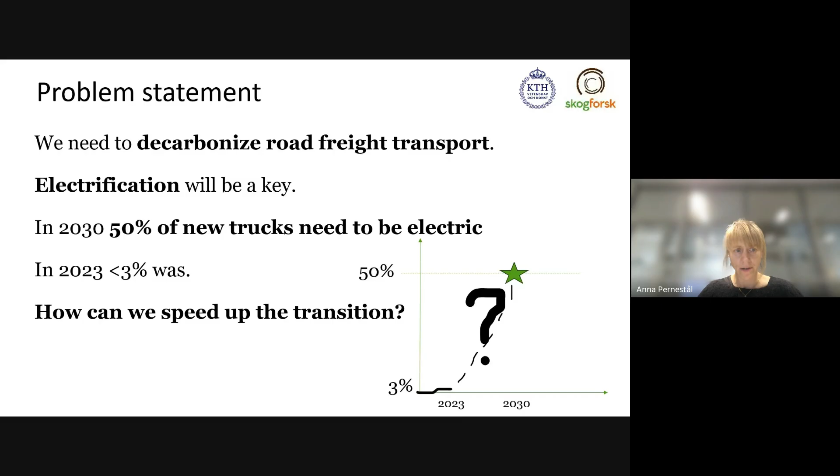We know that we need to decarbonize road freight transport to meet climate goals, and we know that electrification will be key. To reach the climate goals, we need 50% of newly sold trucks to be electric by 2030. In Sweden, it was 3% in 2023; in Europe, around 2% across the board. China is leading, but I think Europe is in second place. That means it's even lower in the rest of the world. So the question we are addressing is: how can we speed up this transition?

We know that nearly 20% of all road freight transport in Sweden is the forestry sector. We have an average transport distance of around 90 kilometers from the forest to the industries, and an average gross vehicle weight of about 70 to 74 tons. So they're relatively large vehicles driving.

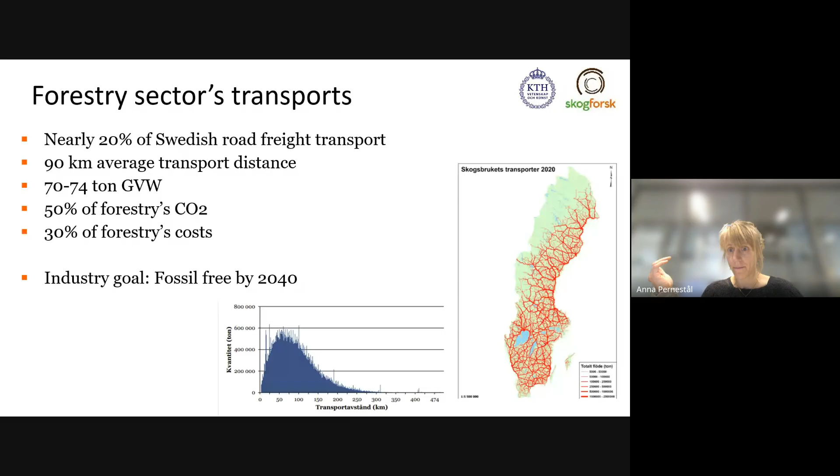The emissions from the forest transport comprise 50% of the sector's emissions. So it's a significant amount of CO2 emissions that comes from transport in Sweden in this sector, and it's 30% of the cost, so we need to do this transition also cost efficiently. The sector altogether has set up the goal to be fossil free by 2040, and they are serious with this goal - that's my impression from meeting the industry.

So the first question is: is it feasible to electrify forestry transport? These are results from a simulation study I've done together with my colleagues, where we have developed a fleet planning tool that takes a lot of inputs - the transport demand, the share of electric trucks in the fleet, vehicle specifications, charging networks, etc. - into a fleet planning tool which we call ElRutt, which is 'electric routing' in Swedish.

It basically finds, for a certain fleet with a specific share of electric trucks, the optimal routes. This simulation tool uses detailed road data and detailed energy consumption models, so it is quite realistic.

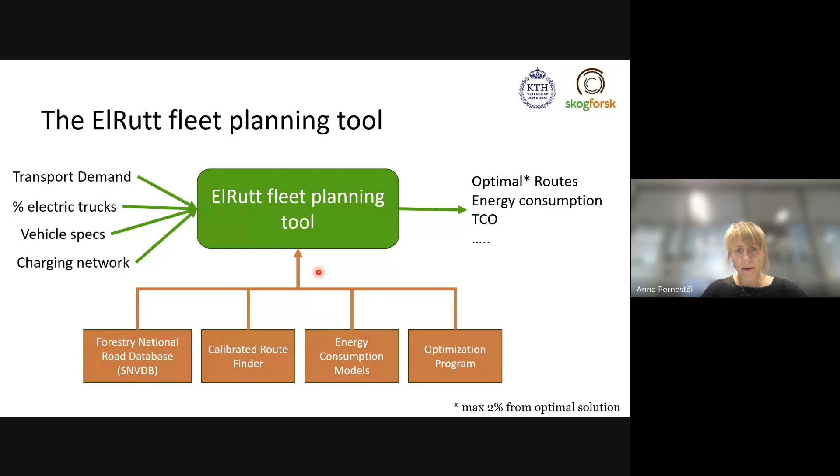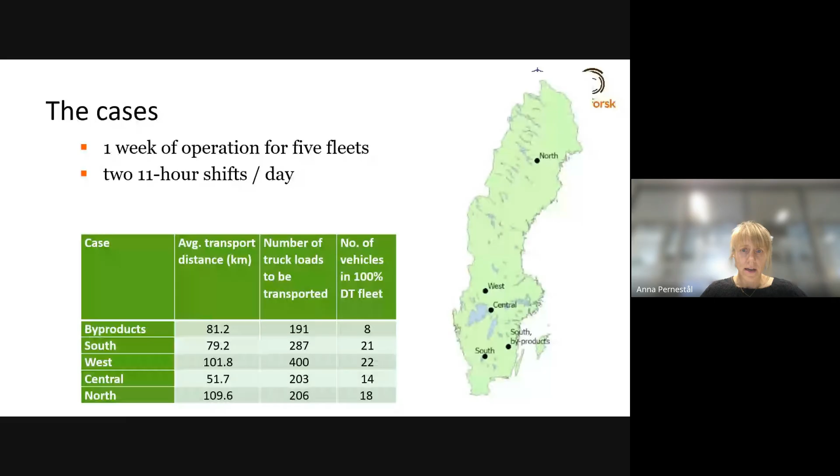When we studied the results, I just wanted to give you a few examples. We have analyzed transport data from different cases using this tool, spread out over the country - and I stress this spread over the country a lot, because the conditions are very different being in south of Sweden compared to north of Sweden, both climate, but also transport distances, and actually the business context differs between different parts of the country. We have used the tool to analyze data from 5 different real transport cases, and we have a preprint of a publication out there, so you can read more about the details.

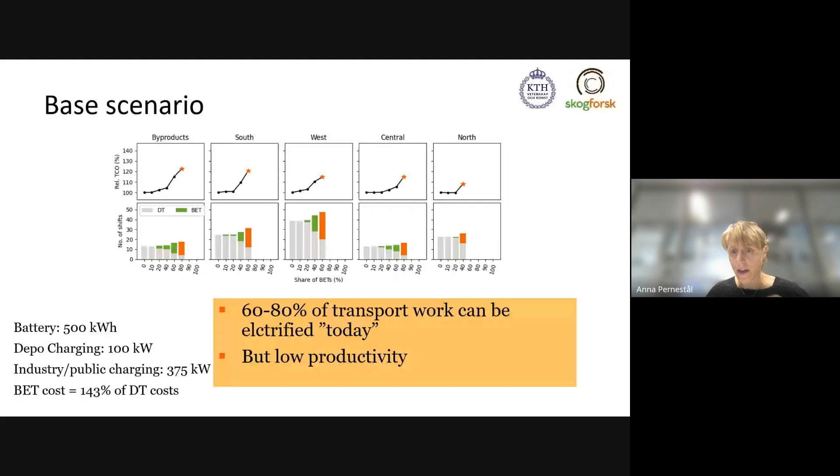Just to highlight some findings: we found that already today, around 60 to 80% of the transport work can be electrified, if we assume technology development that is the best you can buy from a truck shop today, and with about the charging network that could be present around now. So I think it's interesting to see that already today, with today's technology, we can do quite a lot.

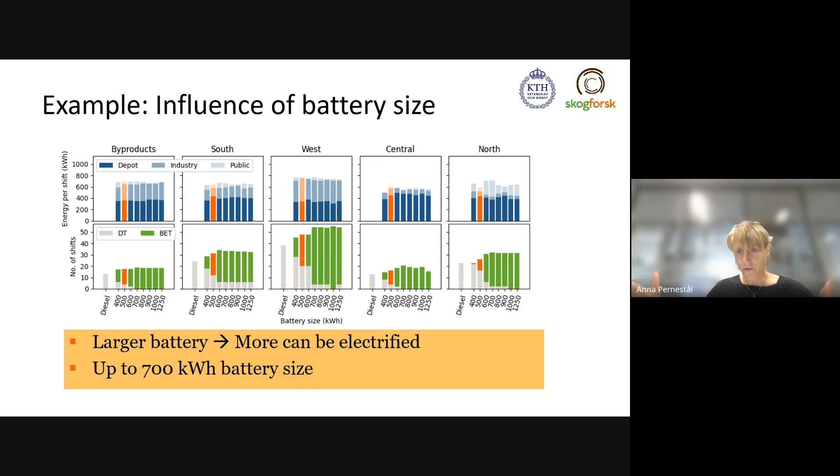We have run several different types of scenario analysis, varying different parameters. We learned that with a larger battery we can of course electrify more, but that is only valid up to a 700 kilowatt hour battery size. Going bigger for the batteries doesn't help, because we need to stop and charge anyway, due to the driving legislations we have in Europe - you're only allowed to drive for 4.5 hours, then there's a mandatory rest of 45 minutes until you can continue and drive 4.5 hours again. So oversizing is not a good idea.

There are more different simulations in the preprint of the paper, and hopefully soon also in the paper, which I'm super happy to share with you if you are interested. We have also run simulations looking at potential future scenarios, varying several parameters at the same time. When we vary the diesel price, charging network, and battery size at the same time, in a scenario that mimics what we believe would be present in 5 years from now, around 2030, the graphs tell us that we have around TCO parity between diesel and electric trucks, and that it's possible to electrify nearly all the transports.

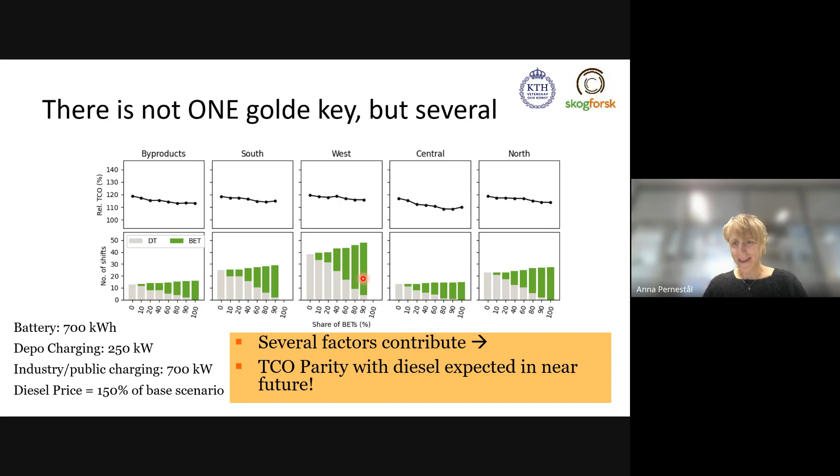The graphs tell us that with electric trucks we will need more trucks compared to diesel trucks, so the productivity of each single truck will be lower. But on the other hand, the operational costs for battery electric trucks will be lower, so we still reach cost parity. This all sounds good, we are happy and believe in this for the future.

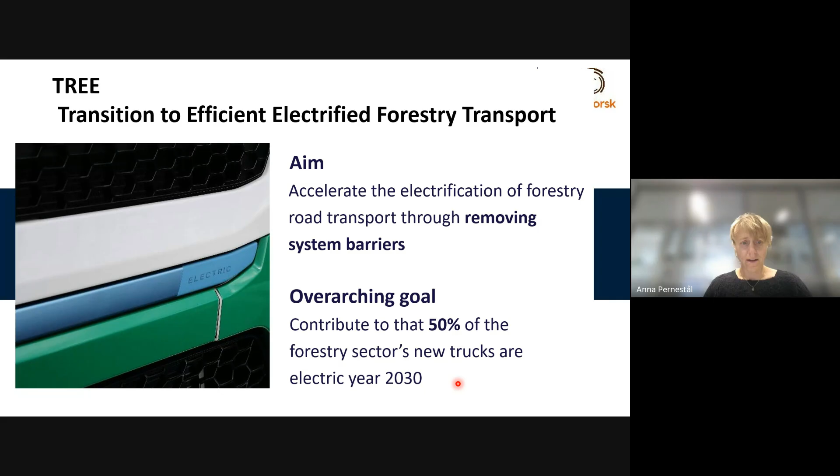In the project we will operate 12 electric trucks and one electric trailer. One of the trucks is a high-capacity transport, 94-ton gross vehicle weight, fully electric, transporting wood chips. We will also try mobile energy storage systems.

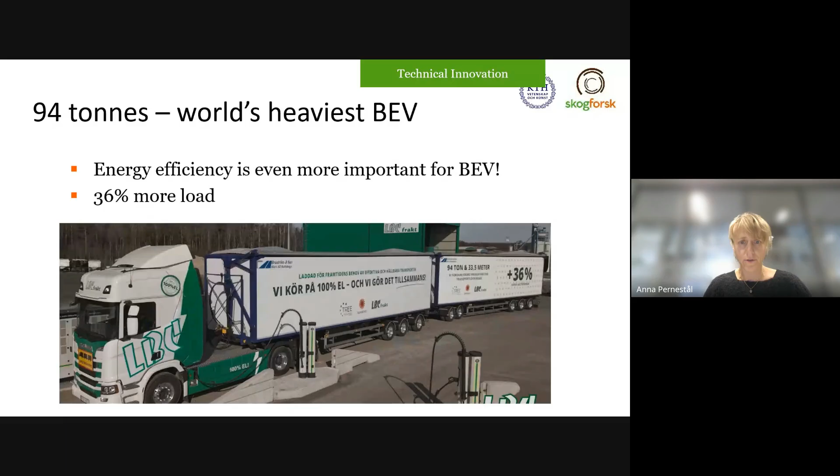We are also trying other innovations, for example an electric trailer which we are currently testing on the test track, to see how we can benefit from regeneration. The electric trailer can be used together with diesel trucks to hybridize them, but it can also be used as a range extender together with a battery electric truck.

We also have mobile energy storage systems. Sometimes a challenge in Sweden is not grid congestion, which is a problem in many other places, but especially for the forestry sector it could be grid connection at all. So we think a mobile energy storage system, basically a power bank for trucks, could be an alternative.

We are also talking about developing digital fleet planning tools. We know they are super important and critical. I don't have time now to go into the details, but we are doing that also. If you're interested in any of those parts, please feel free to contact me.

We have also done some work on what drivers think about driving the electric trucks. They typically think about charging, whether the business can be profitable, and flows and logistics. But we also know that those who have tried it don't want to stop - they love the work environment.

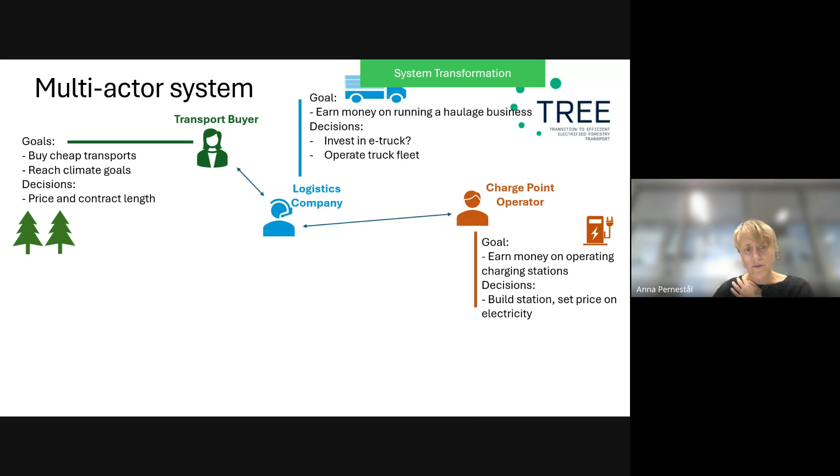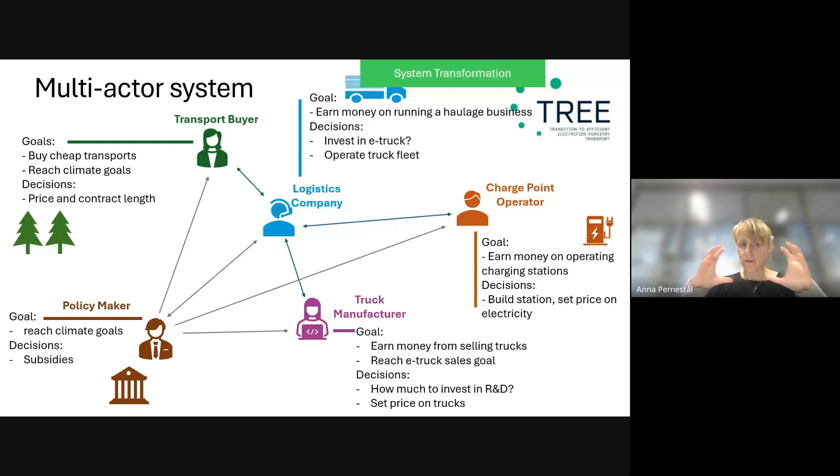And we are also testing - I think my 20 minutes are about out - but I just want to highlight that we are doing systems modeling, exploring how the different actors' goals and decisions will influence each other, and how we can understand what interventions on the whole system can speed up the transition. So with that, there's a lot to talk about here.

Just to end this presentation, the transition to electrified forestry transport is possible. We have learned that, and it is necessary. But it is indeed a complex system, so the only way to do it is to do it together.

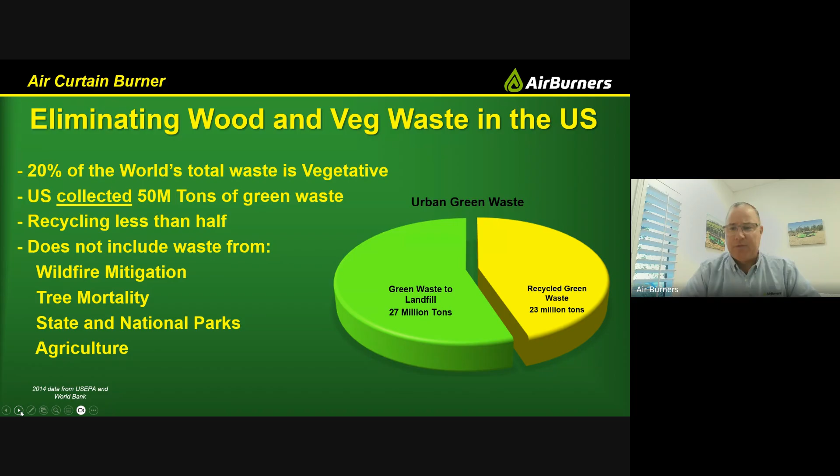The agricultural industry is really big in California, and they switched to utilizing our machines to dispose of wood waste, as we're known as the best available control technology - which simply means we're the cleanest way, environmentally. The fireboxes and air curtain burners are the cleanest way to dispose of wood waste, and also the least expensive way. So tree mortality is a major issue.

How do we eliminate our vegetation waste today? You can grind it and haul it to a landfill, or open burn it. This is a prime example of a grinder running - this was a test in Australia they wanted to do, an opacity test for our machine. This was a Peterson Pacific grinder grinding wood chips that just happened to be there the same day. Once they stopped running the grinder, you can see the air curtain burner running behind it. That's the point of our machine - you're able to dispose of wood waste, turn it into a soil amendment, but dispose of it in the cleanest way possible.

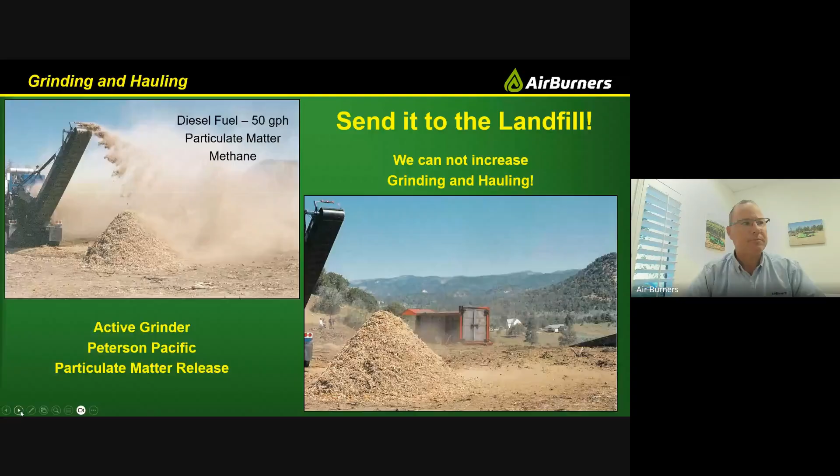Open burning is very slow. If you open burn a stump, that can take 4 days. And if you open burn, it creates a lot of particulate matter that goes up into the environment. So it's slow and smoky. This is an open burn that happened out there, an amazing amount of particulate matter. And if you don't take care of the wood waste in the forest, in areas with spontaneous combustion happening because there's too many chips sitting in one location, you're going to get this problem as well.

So too much wood waste and not disposing of it, that's what we're looking at. This is another test we did with Environment Canada on our machines. This machine is an S327, looking at it compared to open burning.

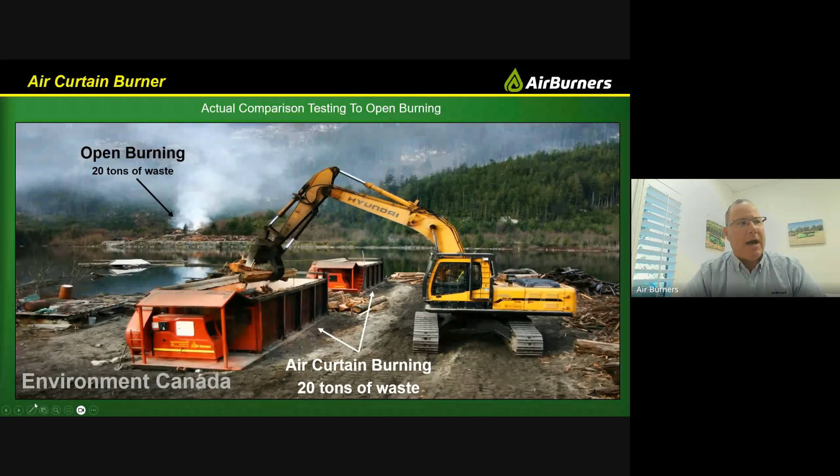This is at the BC Hydro Dam, where all of the wood waste would come up from the waterway and then clog the dam. They used to open burn this material. When they wanted to run a test with our machines, they put out 2 S327 fireboxes. Each firebox burns 10 tons an hour, so they burned 20 tons of wood waste in 1 hour with our machine, and they burned 20 tons of wood waste over on the opposite side with open burning.

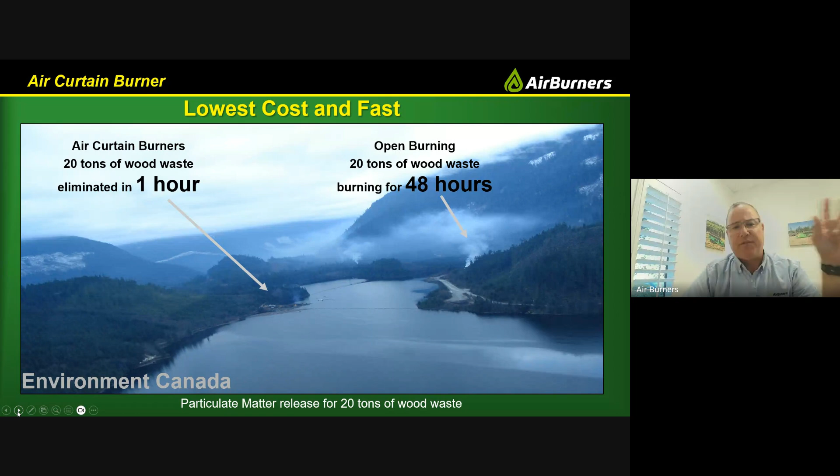This is that same picture, a helicopter view that they took. You can see in 1 hour there was little to no smoke with our machines, and in 48 hours there was continuous particulate matter going into the valley and the mountains from open burning. The fires from British Columbia are very far away in Canada from where we are in Florida, and we were still affected by the smoke here in Florida from the fires in British Columbia. So this smoke definitely does travel, but that was 48 hours of continuous smoke.

So our machines eliminate the wood waste, we turn it into a soil amendment, biochar and ash. And then we also create electricity, which I think is the biggest point of why we're here today. But I think you have to understand the firebox, because this is what we sell mostly of right now, this is what keeps us in business. This is what allows us to grow every year, because so many people need to dispose of wood waste in the least expensive way possible.

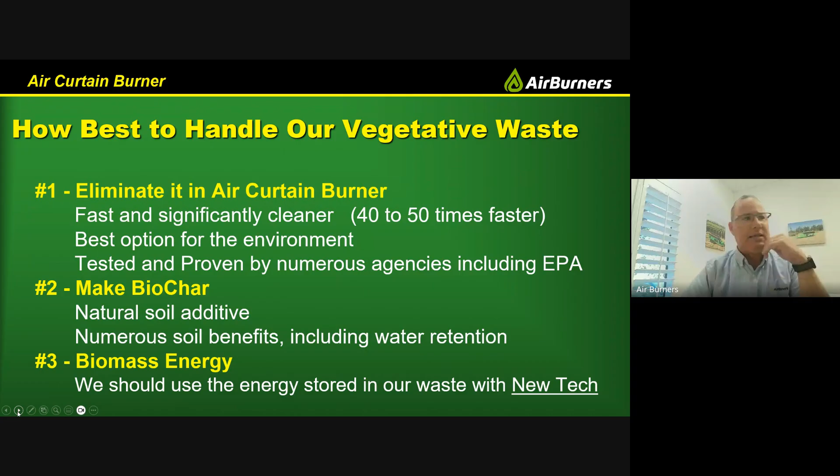And the firebox, 10 plus years. This machine, you can run it 10 plus years with minimum maintenance. Really the only maintenance is the diesel engine or electric motor. In this box that you see to the right, you have a diesel engine or electric motor. It powers a fan, and the fan blows air through the manifold over top of the firebox.

This air curtain, once you start the fire up in the firebox, you turn on the air curtain. What this does is, when the machine's fully up to speed and running and the air is coming out of the manifold, it creates an air lid over top of the firebox. This lid traps the particles of smoke under the air curtain for fractions of a second, causing them to reburn. The secondary burn reduces the smoke particle size so small it generally looks like heat waves coming out of the firebox. The whole purpose of the air curtain is to create this secondary burn.

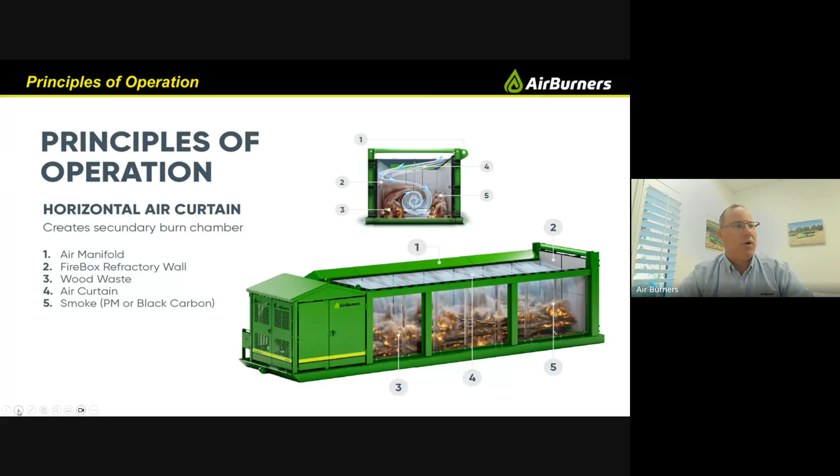The extra air also helps oxygenate the fire to burn as fast as possible. So as I mentioned before, if you were to open burn a stump that can take a few days, inside of the firebox it'll burn up in just a few hours.

Here in the United States, we're one of only 40 companies tested by EPA. EPA tested our machines here in the United States, and EPA in Australia has also tested our machines, but we are a CRADA partner with EPA here in the United States. We are a current CRADA partner with the U.S. Forest Service, and the CRADA agreement with the U.S. Forest Service, they came to us and said we want a machine that automatically produces biochar. We'll talk about that in just another moment. But the Department of Defense, just about every military base across the world has one of our machines, Department of Energy, and then of course USDA, they own our machines and promote our machines here in the United States about creating the ash and biochar.

The different sizes of the fireboxes, and just to preface this, the fireboxes are going to be part of the biocharger we're going to talk about in a moment. So I want you to take an idea of the sizes. You have a 300 series size, a 200 series size, and a 100 series size.

The biocharger is set up for the 200 series size. Once you go to a 300 series size, the firebox gets a foot taller and a foot wider. When you go down to a 100 series size, it's a foot shorter and a foot less wide than a 200 series firebox.

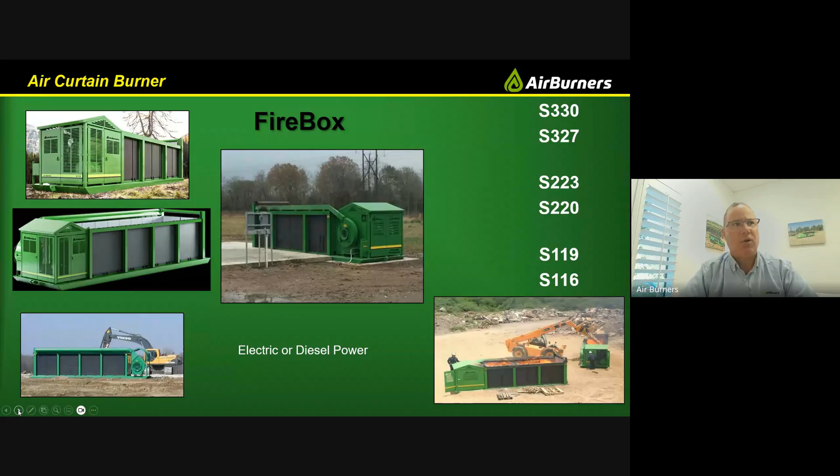The last two digits give you the interior size of the firebox you're burning in. The 100 series size fits in a Connex container, and we ship a lot of 100 series all over the nation because it's very inexpensive to ship.

The Boss series is our burn boss. This was designed for the U.S. Forest Service to burn and take care of disposal and do wildfire mitigation out in the forest, and also in the ag industry. This is utilized with farmers who want to make biochar.

We have a track boss, which is like our standard burn boss. Our standard fireboxes have an open floor, so you burn right on the dirt, right on the ground. The track boss has an open floor too, and it has a remote control so you can move it around in the woods. One customer with 3 burn bosses wanted one track boss.

The char boss, on the bottom, is the one the U.S. Forest Service came to us and said, hey, we would like a machine that automatically produces biochar. So the burn boss morphed into the char boss. The char boss has 2 thermal ceramic panels inside the firebox that move, dropping the biochar onto a conveyor belt system. This conveyor belt takes the biochar out of the char boss and drops it into a water pan, locking it into the biochar state.

This machine can produce up to about 500 pounds of biochar per hour. Average is probably more around 350 pounds per hour, processing around 1,500 to 2,000 pounds an hour in the unit itself. You'll use about 12 gallons of water per hour running this machine, up to about a 30% biochar conversion. I have many documents and tests on this, so we can go into it in more detail in the future.

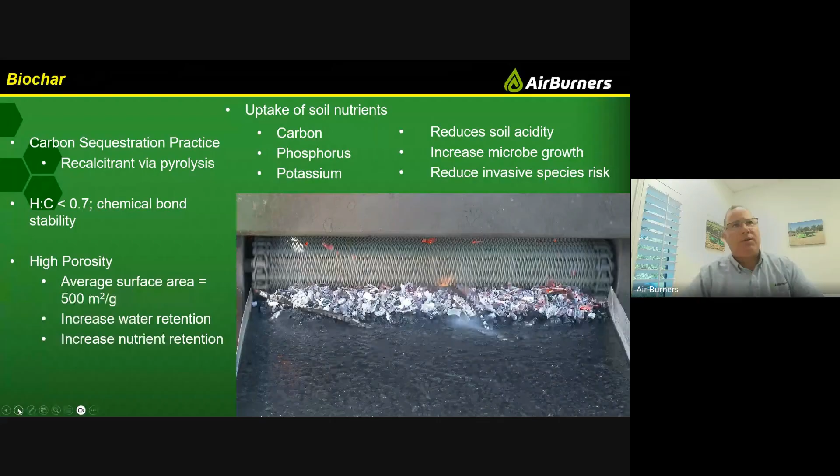The next machine I'd like to talk about is the biocharger. These machines are both newer to the market. The biocharger wasn't feasible before due to batteries being too expensive. Now, working with Rolls-Royce, we were able to purchase a battery from them, and working with Rolls-Royce and Volvo Construction, we were able to produce this machine.

This machine is an off-grid power producing machine that you can put your wood waste that's not being used, your slash, your stumps that you don't have marketable material for, into the biocharger and create electricity. So you dispose of your wood waste, create biochar, create ash, and create electricity.

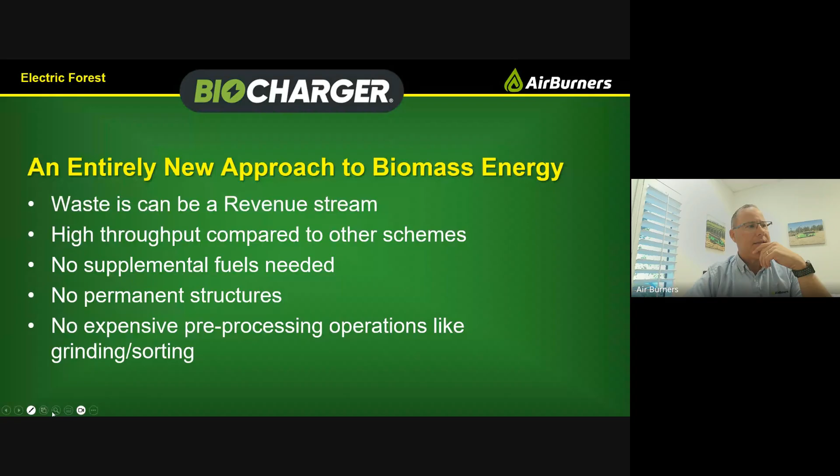This is a complete portable piece of equipment. Unlike the past structures, your typical biomass incinerator would incinerate chips to create electricity, but that was too expensive, emissions were too high, you had to transport and grind the material twice, a lot of hauling, many emissions. Once it got to the biomass facility, you took a complete burnable piece of material into one that doesn't burn, so they had to use supplemental gas or diesel fuel to burn the chips, all to create electricity.

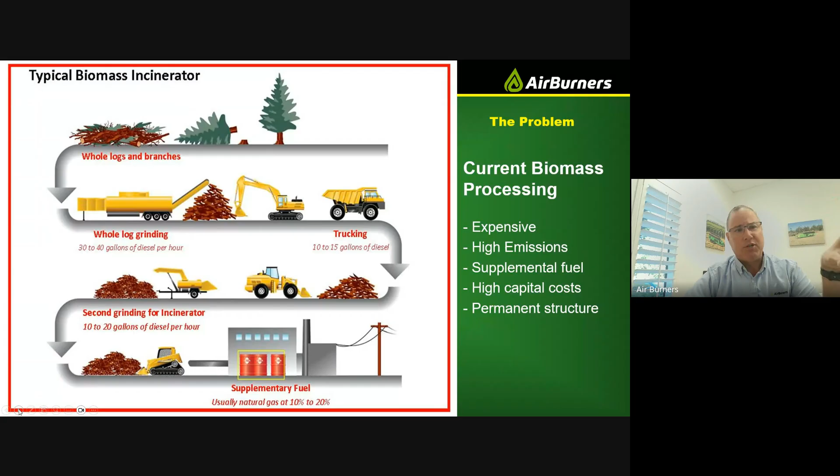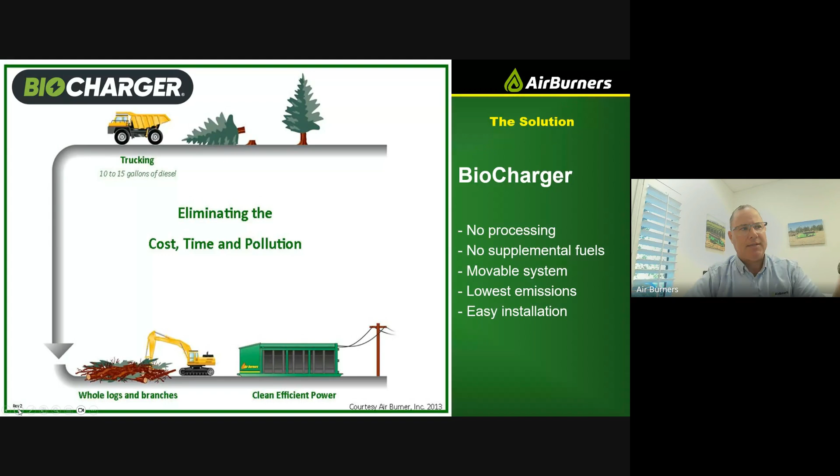Now our machine is portable, takes 6 hours to set up, 6 hours to take down. You take your stumps, logs, branches, slash, anything not marketable, burn it inside the firebox, dispose of it, make biochar, make ash, make electricity. Once you're done using it, you can move it to the next location. My recommendation is keeping it in an area for at least 6 months, give or take.

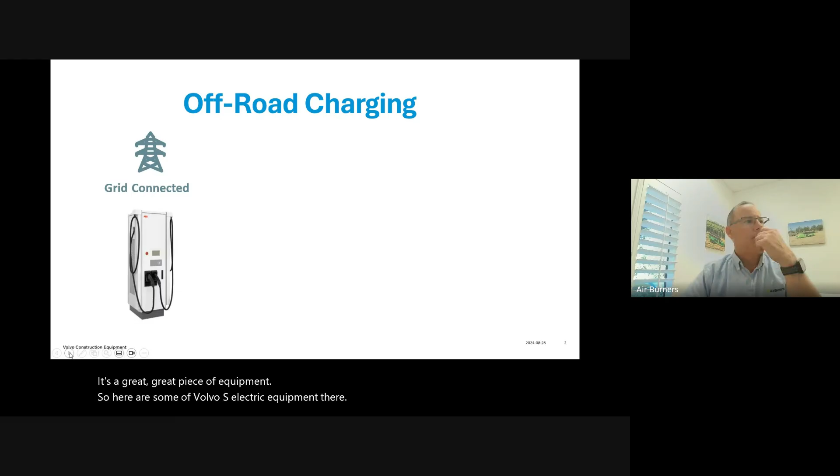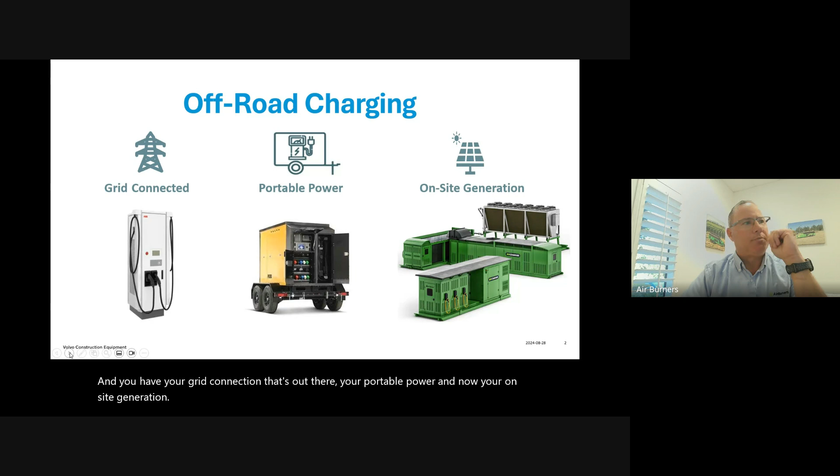And you have your grid connection that's out there, your portable power, and now your on-site generation with a biocharger. What is it and how does it work?

You have 4 pieces: a firebox module, a cooling module, a power module, and a battery storage module. This is off-grid, not connected to the grid.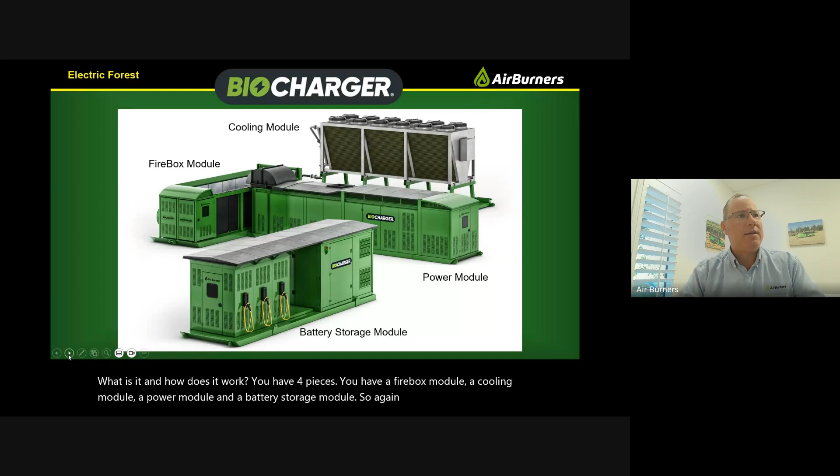With this, you're going to dispose of the wood waste inside the standard firebox, at 3 tons an hour, 5 tons an hour, 7 tons an hour, 8 tons an hour, or 10 tons an hour, depending on what size firebox you want, or how much wood waste you believe you need to dispose of.

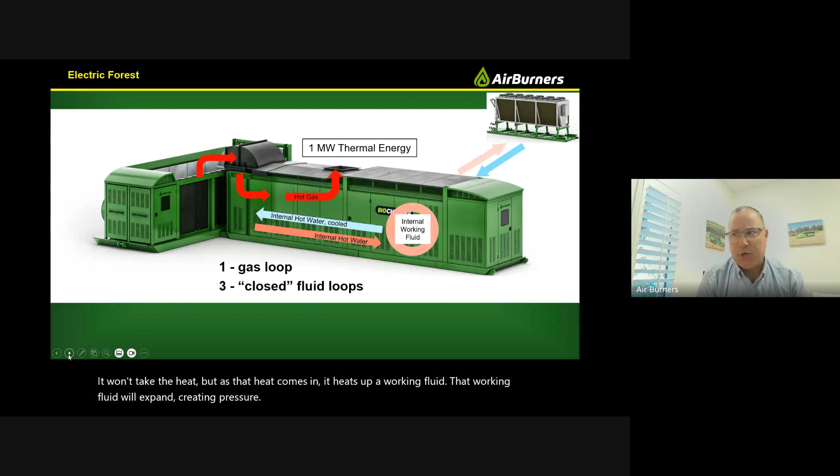As that heat comes in, it heats up a working fluid. That working fluid will expand, creating pressure. That pressure turns the screws inside of the ORC system, the organic Rankine cycle system. That's the part that makes the electricity.

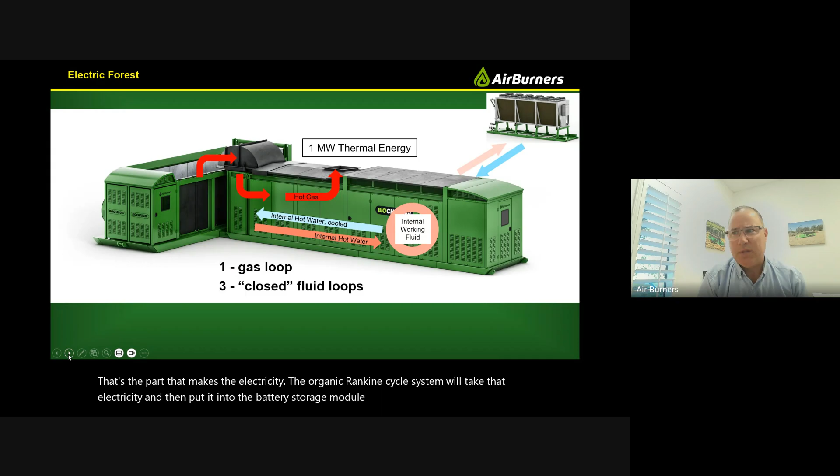The organic Rankine cycle system will take that electricity and put it into the battery storage module, built by Rolls-Royce, currently a 600 kilowatt hour battery storage module. This module will hold on to the electricity.

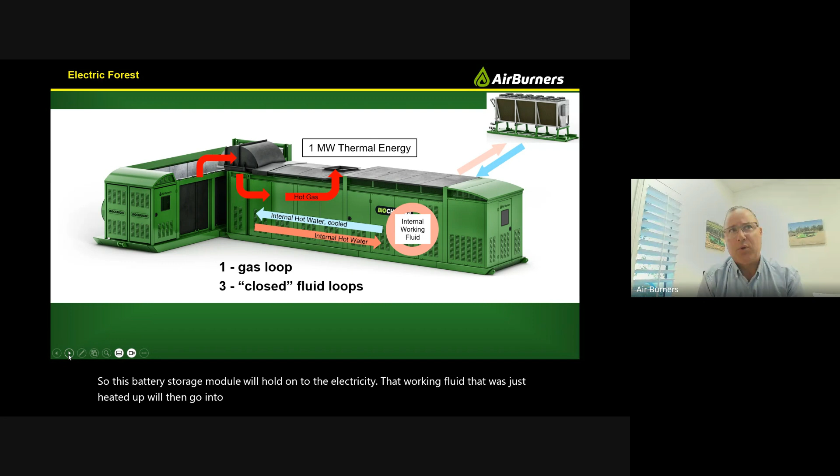That working fluid that was just heated up will then go into the cooling module. The cooling module will cool down the working fluid, and then it will be reintroduced back into the power module. This entire system works off of a red button and a green button.

So it is an automated system. The end user just needs to add wood waste into the firebox module to keep the heat going. When the power module needs heat, it'll grab the heat automatically.

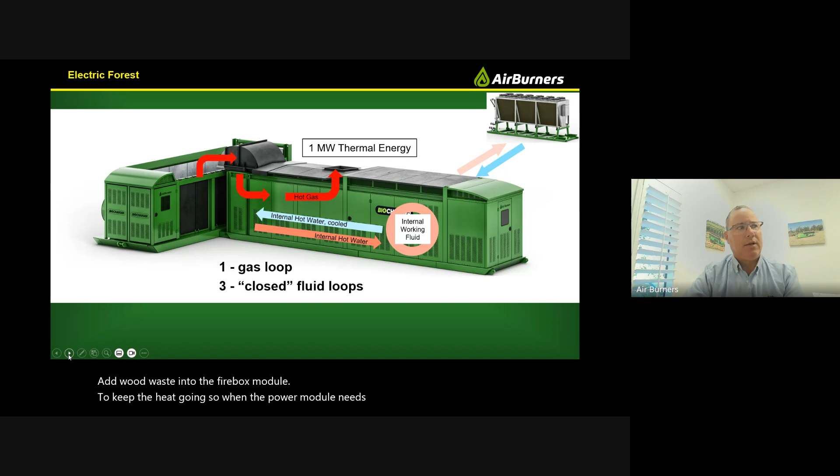This is a system being set up out in California. One county, Kern County, purchased 3 systems. They have 2 PG fireboxes and 1 biocharger. The only difference is one is on grid, the other is off grid.

The PG firebox is the one that's on grid, so it does not have a battery storage module. The PG firebox is connected to the grid.

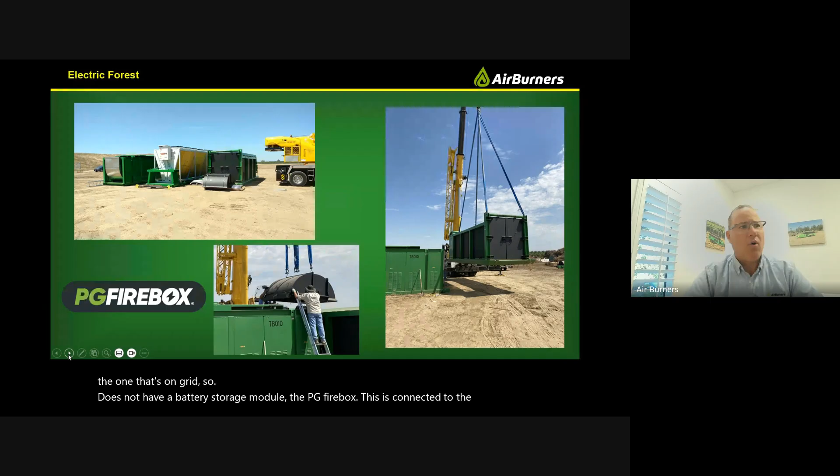The ORC system we currently have is a 100 kilowatt ORC system, but coming out in 2026, I believe, our engineers are working on a 350 kilowatt system. So this basically means a bigger battery and a bigger ORC, more electricity.

The PG firebox hit the market about 8 years ago. This was something we thought about for 25 years. The president of our company and head of engineering wanted to build this system, but it took a while to actually hit the market and become feasible.

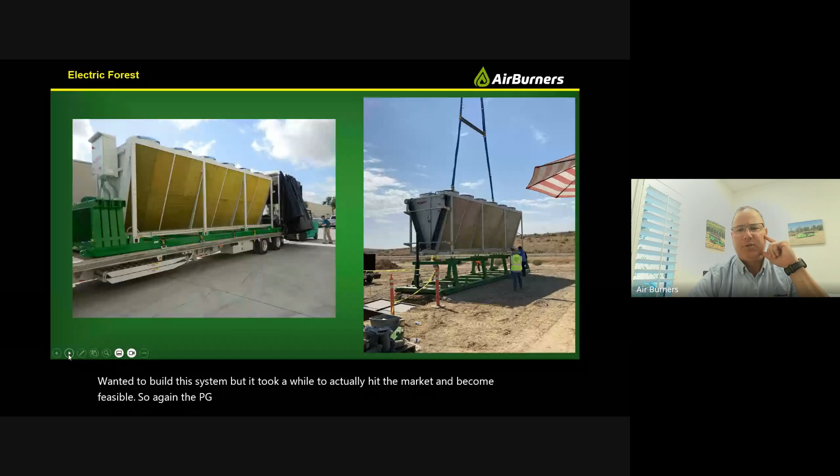So again, the PG firebox is on grid, the biocharger is off grid. This is the cooling module. All of our machines are portable, designed to be dragged around, so you can move from one location to the next.

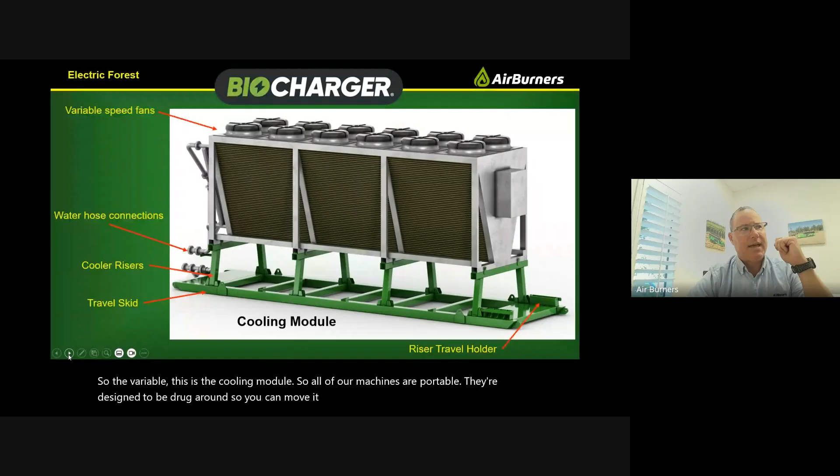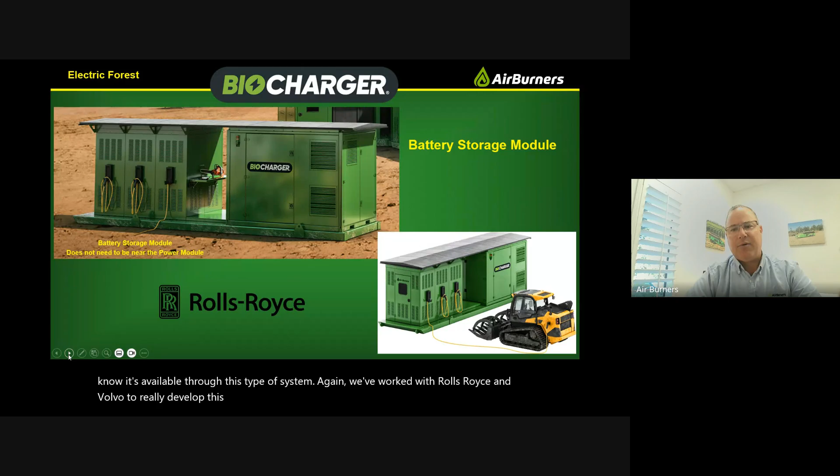So this is daytime operations. You go, you dispose your wood waste. This system also has 1 megawatt of thermal energy.

If you wanted to set up a kiln out into the forest and dry the wood waste, cut the wood waste and ship it out of the forest, you have 1 megawatt of thermal energy you can utilize from this system as well, but more importantly, charge your electric vehicles out in the field.

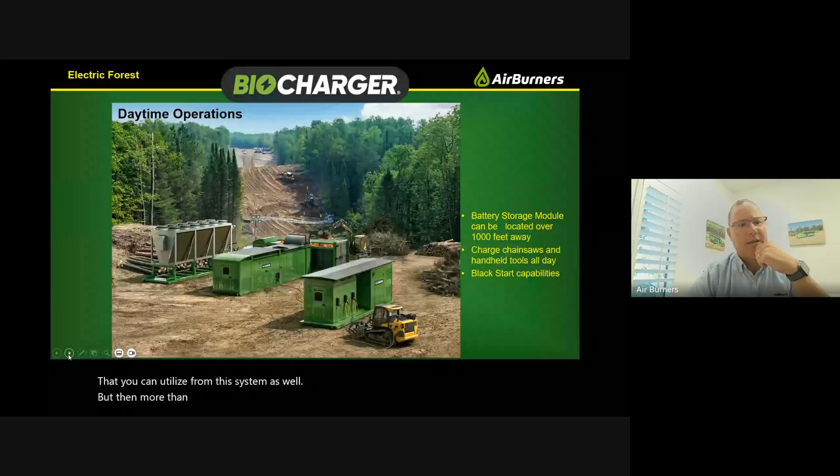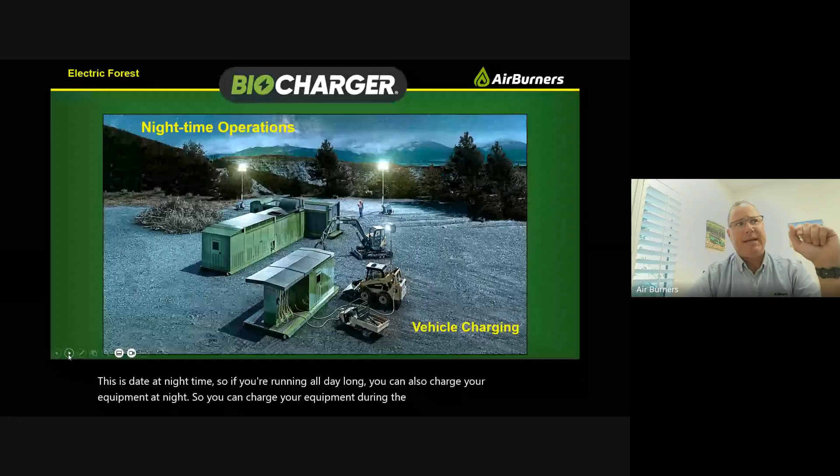This is at nighttime. If you're running all day long, you can also charge your equipment at night. So you can charge your equipment during the day and charge your equipment at night. This system will continuously just charge.

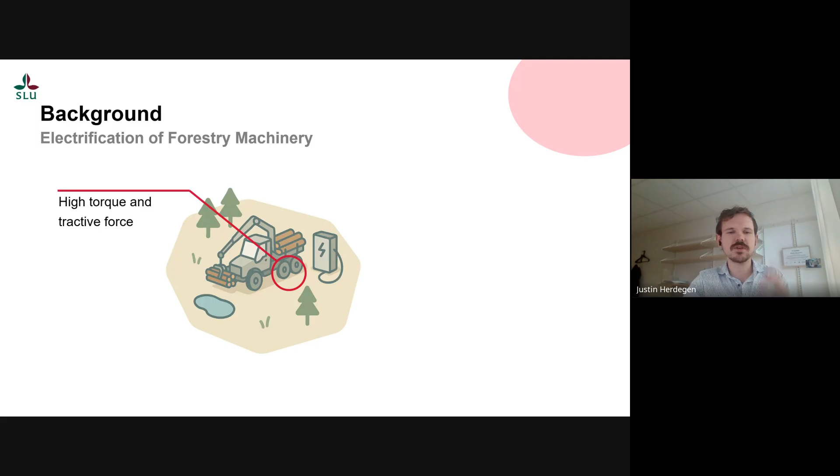So electrification of forestry machines itself is a good thing and has a lot of benefits, and is currently catching on speed, because you have things like high torque and tractive force. We have benefits such as avoiding emissions, the potential usage of renewable energy, and as well as other big advantages.

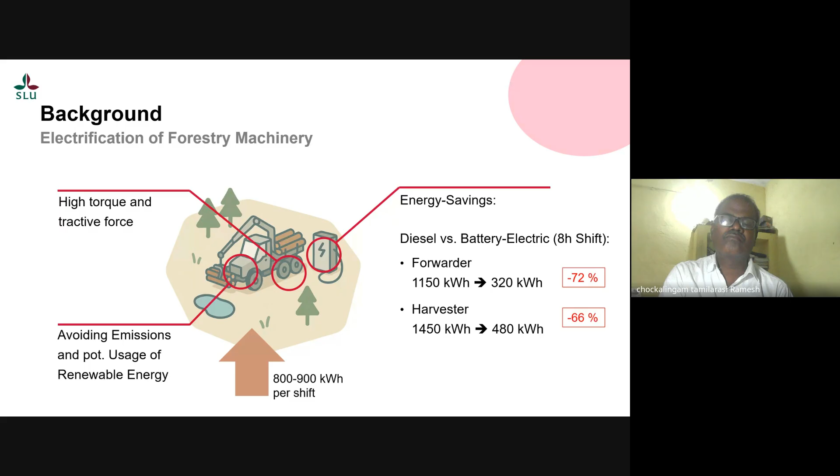Apart from avoiding emissions, the second helpful thing is that you can save a lot of energy, depending on first studies and also other sectors, it's up to 70%. But still you need to supply quite a huge amount of energy to the work site, which for a two-machine system like it's currently used mainly in Sweden, is around 800 to 900 kilowatt hours per shift.

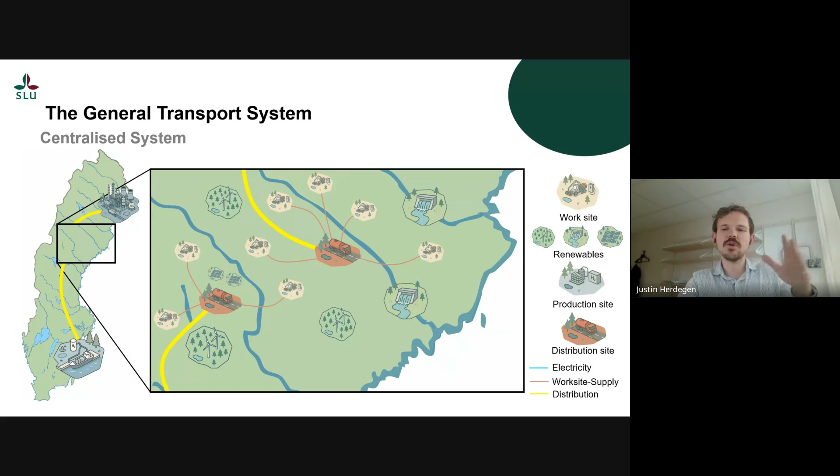But then you also have a centralized system like it's currently with diesel, where the energy carrier is produced in real big centralized locations and then only transported in the region to be distributed. We will look more or less over different energy carriers, so from the energy source, where the energy is coming from, how to produce the energy carrier, how to transport it, and also then how we can use it on site.

But first, just a quick talk about the energy sources. Renewable energies are becoming now the backbone of a future energy system, and also therefore of a future supply system, because it became more and more competitive and is now, even without subsidies, more competitive or equal to a lot of fossil sources, and therefore very important.

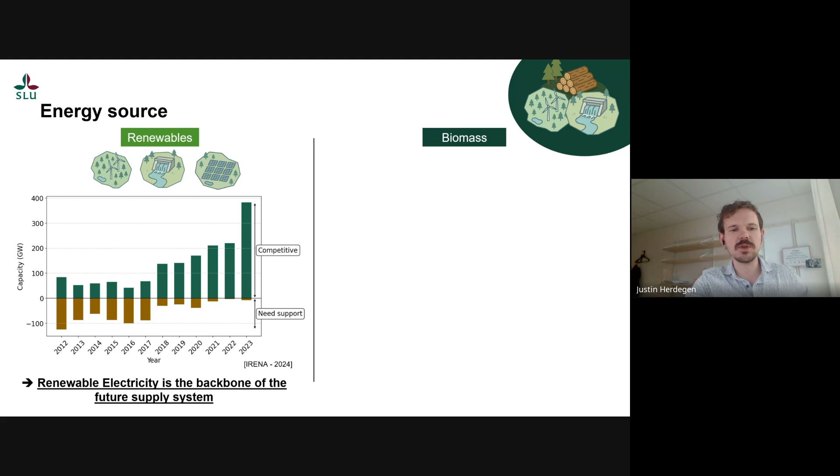Another thing is biomass, which we are more or less in that sector, I think. But a big problem for biomass is that studies show, the graph you see is for Europe, a lot of sectors are counting on biofuels and other usage of biomass to mitigate carbon emissions. But the problem is that current predicted demand probably won't be supplied by the available supply, which is why I think biomass and biofuels should more be reserved for sectors where there's really a lot of difficulty to electrify. And therefore we more or less focus now on electricity.

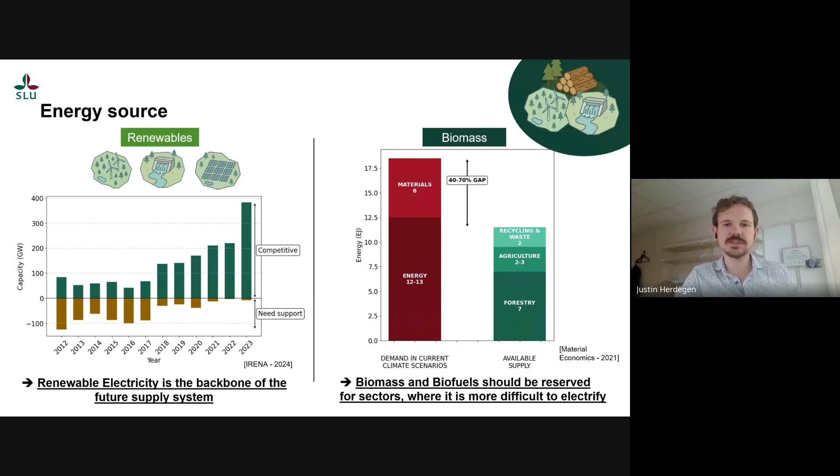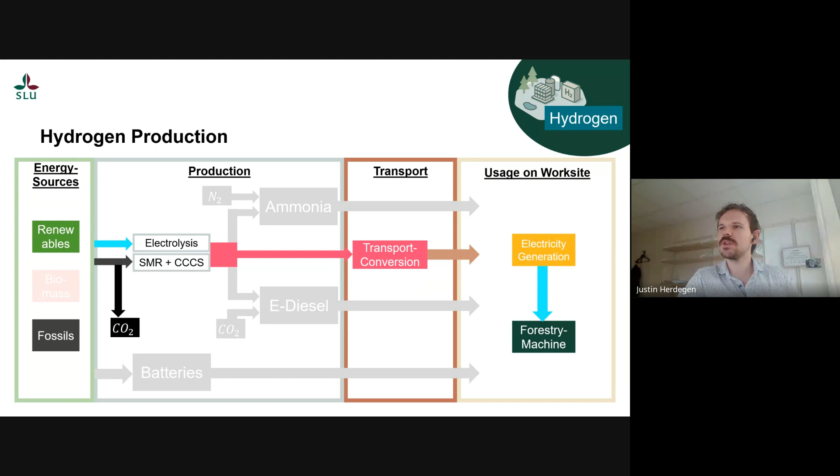Let's start with the first energy carrier, hydrogen. There are more or less two main production pathways. The first one is electrolysis, where you use electricity generated from renewable energy to make hydrogen out of it. This is possible in a decentralized way too, since small production plants exist as shown in the picture. The production itself has no direct emissions.

Contrary to that, the main production pathway used now is steam methane reforming out of natural gas. With carbon capture and storage, it can potentially become low carbon hydrogen. But due to upstream emissions, mainly from natural gas mining, there's still a question mark if it can really be made low carbon. This is also a centralized system, since you need big production plants for that.

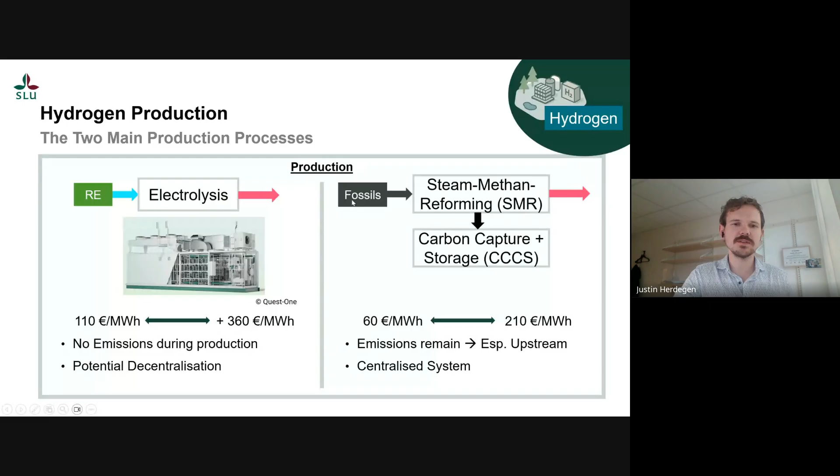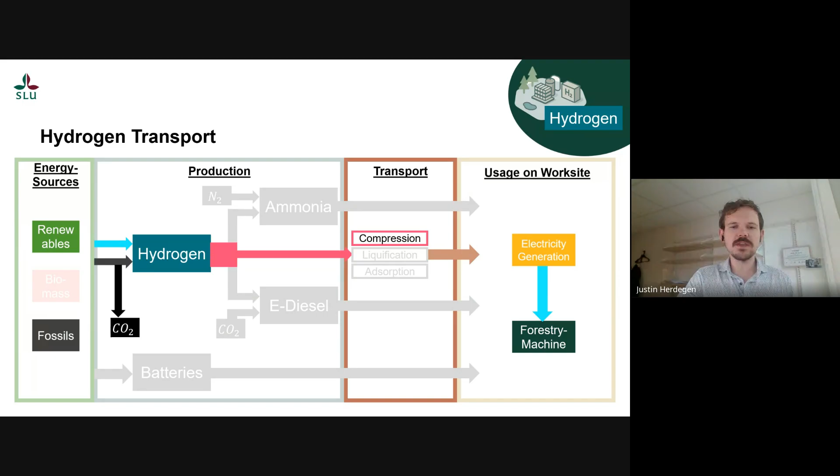Now let's go to transportation. The main way to transport hydrogen is compression. You take the low pressure hydrogen from the production plant and compress it into higher pressures. There are different systems, like a 350 to 500 bar system and a 700 to 950 bar system, and also different tank types depending on cost and weight.

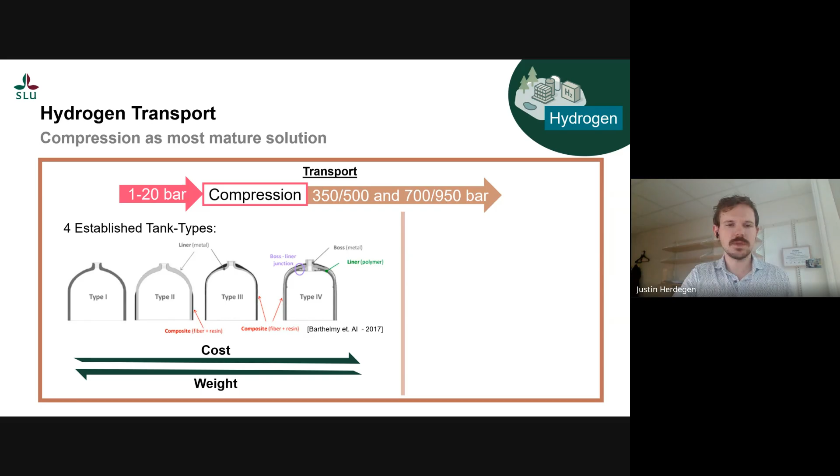An important thing for us is that hydrogen is a dangerous good. For most road transportation in the world, the ADR classification and ADR rules apply, and it's classified as a flammable gas, so it needs to be handled accordingly with maintenance and proper sensor systems. An interesting thing is that below a certain volume you transport, you only need to apply lower requirements, which a lot of people call ADR light. For hydrogen, that limit is 333 liters.

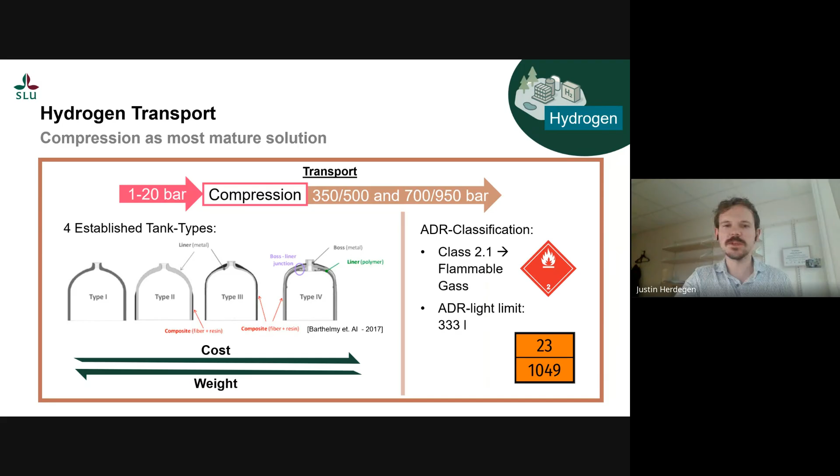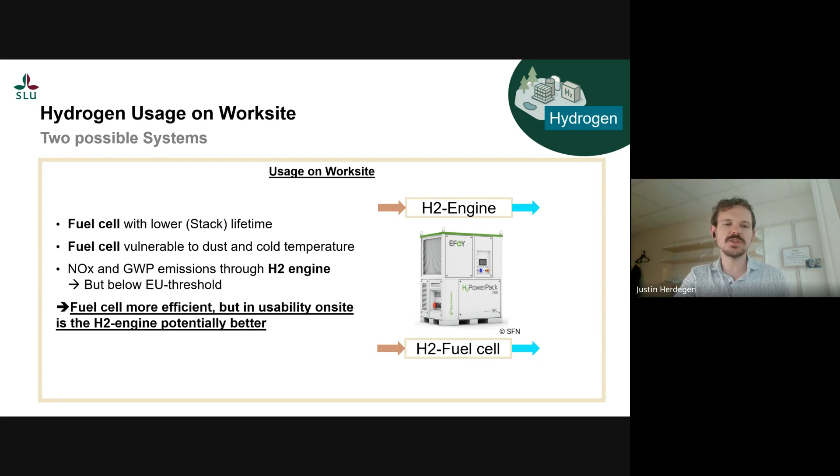The last thing is usage on the work site. You can use it either in an engine or a fuel cell. Fuel cells are more efficient, but regarding usability on site, a hydrogen engine has more protection against dust and is not so much affected by cold weather, which is why I think the hydrogen engine would probably be a better option for us.

The second energy carrier is ammonia. Ammonia is more or less also a hydrogen carrier, generated from hydrogen together with nitrogen in the Haber-Bosch process. This is a complex and intensive process, which is why it needs to be in a centralized system. Ammonia itself is pretty common all over the world.

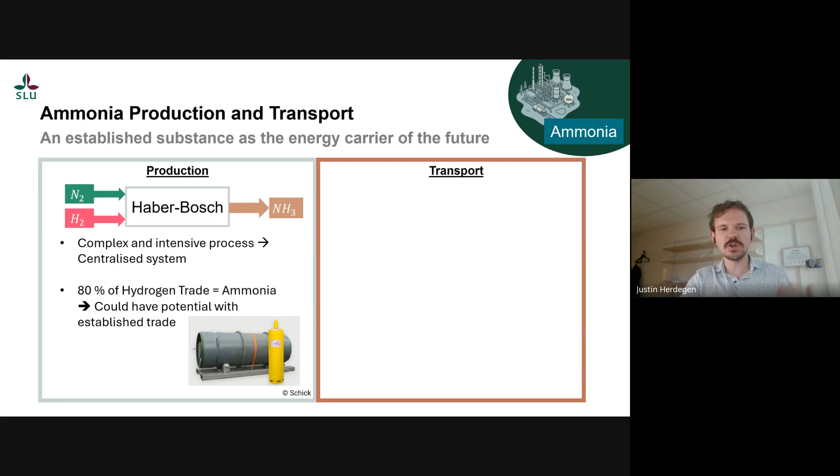In the US, farmers use it mainly for fertilization, and fertilizers are produced out of it, which is why it's quite well known how to handle. This is also why 80% of planned hydrogen trade is planned as ammonia, which shows quite the potential ammonia could have.

Transportation is also done via compression, because at around 10 bars at room temperature, ammonia becomes liquid and can therefore be stored quite easily in normal steel tanks, but with ammonia-ready components, since ammonia is a corrosive gas and is also classified as such in ADR. It's additionally a toxic gas, so proper maintenance is important, and everyone handling it needs to be educated on it. It has a quite low ADR limit of 50 kilograms.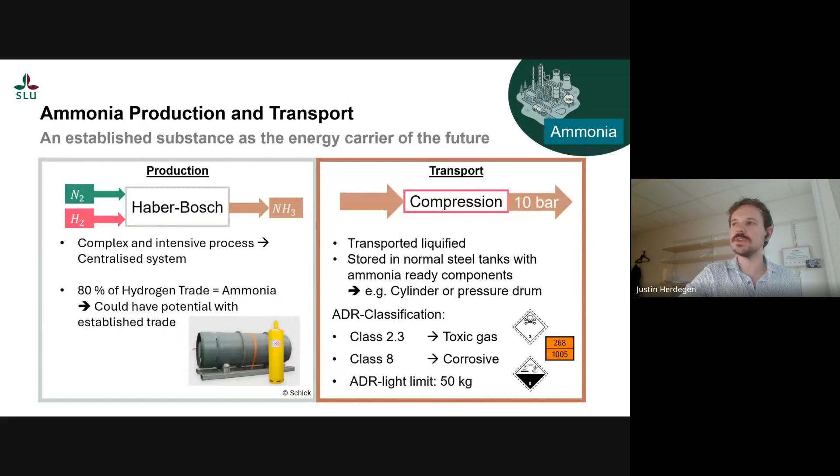To use ammonia on site, there are currently two main options. One is mobile crackers, where you crack the ammonia to get the hydrogen out of it that was put in, and then use the hydrogen on site as shown before. Or you use ammonia engines, which are currently catching on in maritime operations. Most of them need a bit of extra fuel, like hydrogen or diesel, to operate smoothly over the full range, but this hydrogen can also be generated out of the ammonia itself, so you don't need a separate tank for additional fuel.

The third energy carrier I want to talk about is e-diesel or e-hydrocarbons. It's more or less also a hydrogen carrier, like carbon hydrocarbons, and for that you need the carbon, as the name says. And to be really carbon neutral, the carbon needs to come out of the atmosphere.

The main process for that is direct air capture, which captures the CO2 out of the air with electrical current and also thermal heat. This is also the main bottleneck of the whole thing, because it's still quite in development, and prices differ quite much, and there is also not a lot of trust in the future market, as it seems right now, because of all announced Fischer-Tropsch production till 2030, it would only be enough to supply 1.6% of the jet fuel demand.

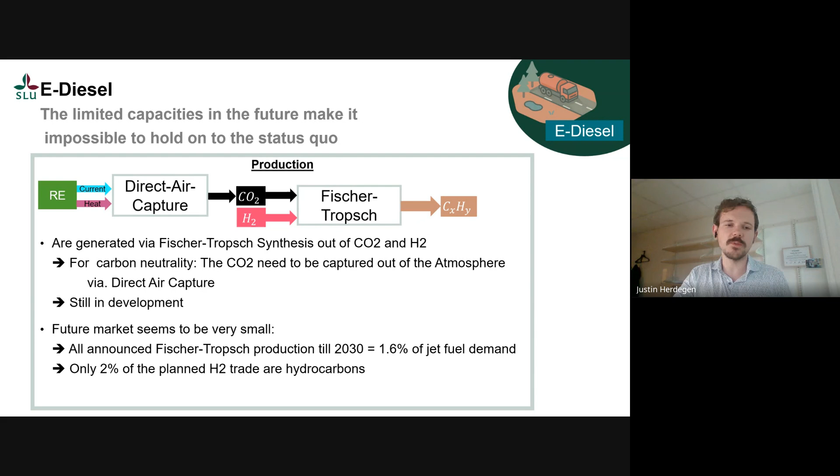Aviation is one of those sectors where electrification is really, really difficult. So this is one of the main application sources, and you see it doesn't really cover that in any way. Also only 2% of the planned hydrogen trade are hydrocarbons, which is quite low compared to, for example, the 80% of ammonia I showed before. It's more or less the same as with the biofuel before.

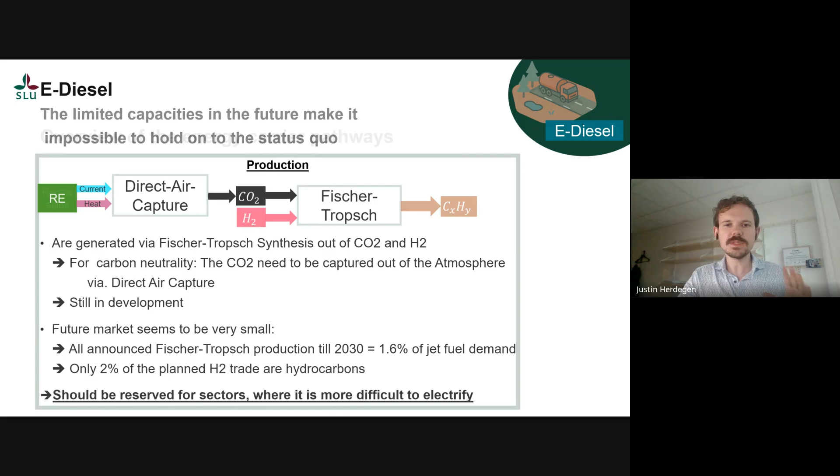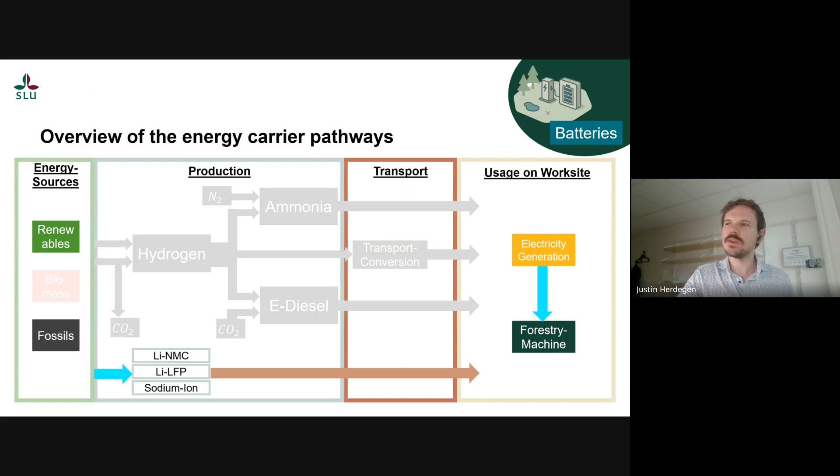It should be reserved for sectors where it's more difficult to electrify, and therefore it shouldn't be the main solution. Which is why we put that a bit in the background and focus on our last energy carrier, which is batteries. We currently have three main commercial chemistry types: NMC, LFP, and also now different sodium-ion battery chemistries are emerging.

But there is also quite a huge diversity there. Some have benefits in some areas, like LFP has high cycle life and is the cheapest variant right now. NMC, on the other hand, has higher capacity, but they are also evolving quite a bit. The reason for that is there's a huge amount of funding in the development of batteries, and the improvements are really, really strong right now, because you have a mass market and also quite good maturity. This can't be compared to any other energy carrier in this amount.

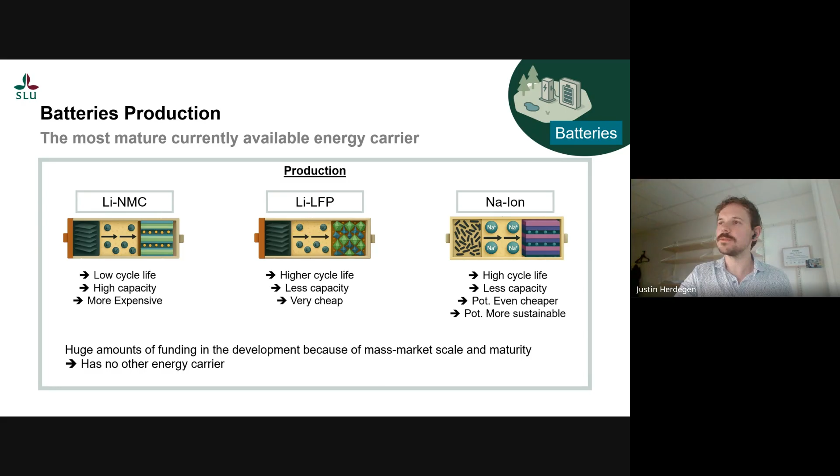For batteries themselves, they are more or less a decentralized system, because you can charge them at more or less any bigger grid access point. Batteries themselves are a quite safe technology, but it also depends a bit on the chemistry you look at. But the safety improvements are ongoing constantly.

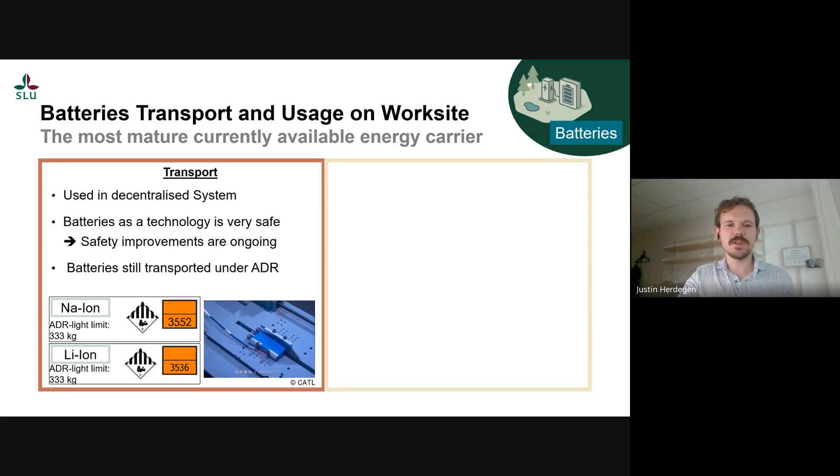Like in the video below, this is the new sodium-ion battery CATL showed, I think, earlier this year, which shows no effect when sawed apart, even fully charged. So you see there is quite an evolvement there. But still, it is classified as dangerous good, and also relies on the ADR regulation.

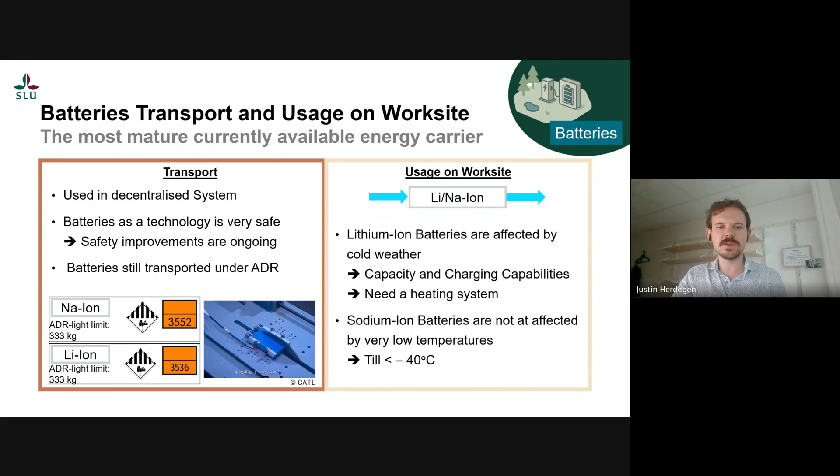The usage on site is more or less, you discharge the battery again. Lithium-ion batteries are affected by cold weather, which here in Sweden is quite a big topic, which can reduce capacity and charging capabilities, and therefore you need a heating system. But there are also evolvements there, and for example sodium-ion batteries currently are affected very little by temperatures, and are even operable till -40 degrees.

So to summarize this a bit, I want to compare some systems, how they could be used right now. We have LFP, a 350 bar hydrogen system, and a liquid ammonia system. The first KPI I want to show you is the efficiency along the pathway. There you see that batteries are quite efficient, because the losses from charging and discharging are quite low compared to all the production and conversion losses you have with hydrogen and liquid ammonia.

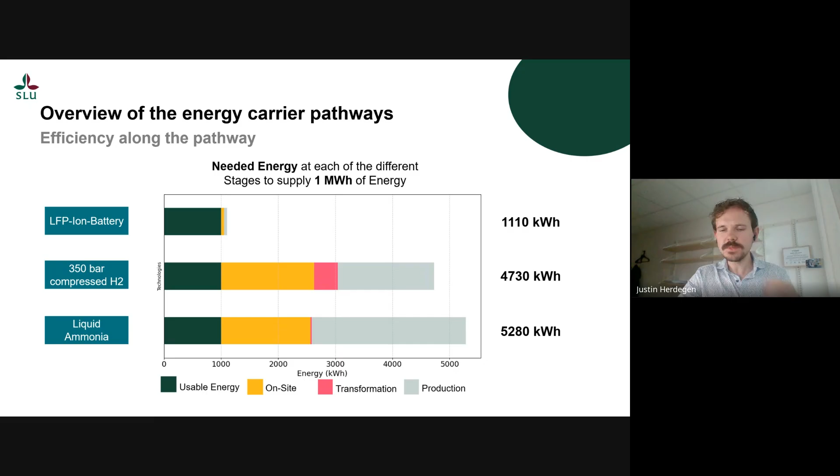But on the other hand, a big important thing for transportation is the energy density, because it more or less defines how much energy you can transport. And if you still remember, we had 800 to 900 megawatt hours that should be delivered for one shift to the work site. Here you see 1 megawatt hour of energy, and how much weight and volume it would represent. There you see that batteries are quite heavy and also quite large in volume compared to the other two systems.

But if you remember, we also have efficiencies which we need to think about, because if it's less efficient on site, you also have to transport more energy to the site. Which is why, if we add the on-site efficiency, we also have additional energy carrier which we need to transport, and then the batteries are nearly equal, at least regarding volume, to the hydrogen system.

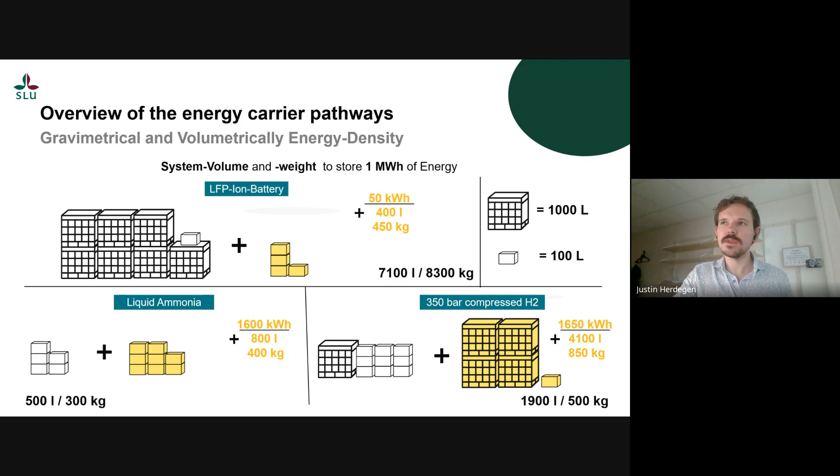To summarize everything, a bit of a ranking based on the literature I found: batteries seem as the current best solution, mainly because of the efficiency, the maturity of the technology, and the high safety. But hydrogen and ammonia could be interesting under certain conditions, especially if production capacity comes as planned and not as it's currently financed. You have bigger sites, far away, where machines work quite long, then a high energy density could be needed, and hydrogen and ammonia could be more interesting. And the third thing is that operators who work on the work site need to be ready to handle the safety related issues with ammonia and hydrogen.

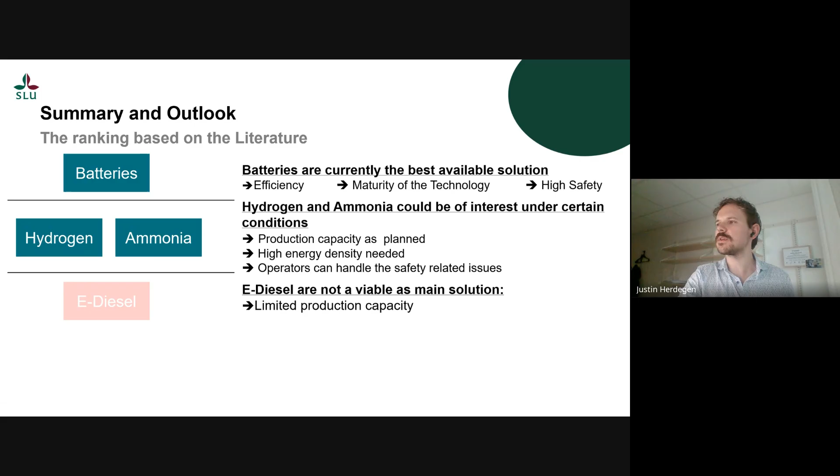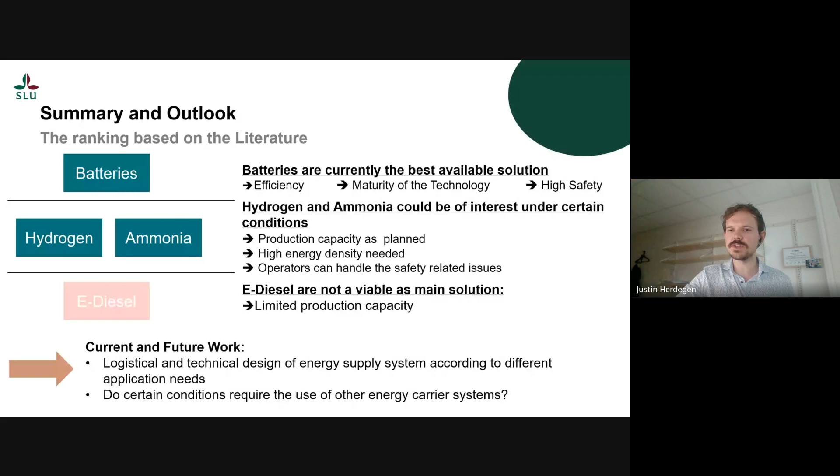And the fourth thing: e-diesel is not really a viable solution, mainly because of the limited production capacity. To round it up, I'm working in a research project that turns around electrification of forestry machines, and we are working together with Komatsu Forest to analyze and evaluate that. My work is mainly focused on the energy supply system, as I showed before. My future and current work is to logistically and technically design this energy supply system and think about at which conditions which energy carrier would apply best.

Yes, and that's my presentation. I'm ready for questions, or also after the presentation, you can always reach out if you have questions or want to talk about something.